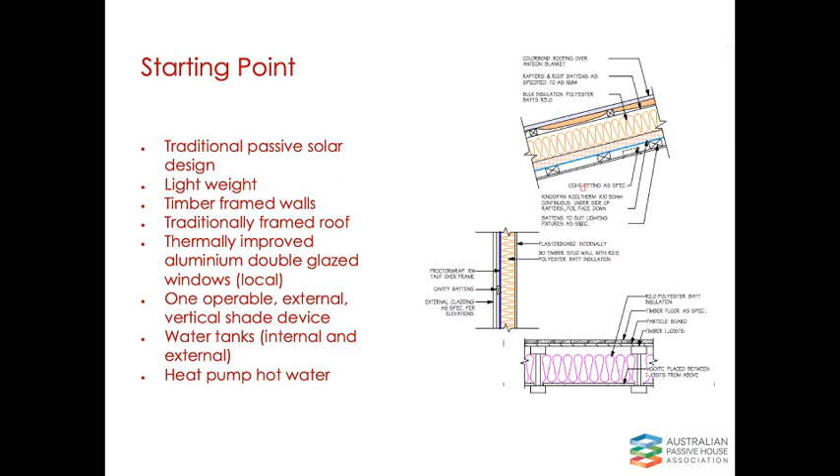This project also had water tanks. There's nothing unusual in that, except that there are 10 of them inside the house as well. That is fairly unique, and I'll talk about that as we go on. Heat pump hot water, and PV on the roof, and all of those things, which again for us were fairly standard back then. Bear in mind this project's got a longevity, like this has been kicking around for somewhere between 3 to 4 years, probably since we first actually sat down and had that first conversation with the client, so it's been a bit of an evolution.

So this is the design of the home, and the great thing about this project and why it's turned into this talk is that this home's been through a series of evolutions in terms of builders, construction methodologies, etc. But fundamentally, the one thing that's never changed is the actual geometry of the building. So it's by default become a fairly good case study. I am not a scientist, my partner is. But it turns out that I designed quite a good research project without designing a research project.

So as you can see, north is up the page. What you can't see on these drawings is that on the left of the page is a fairly busy local road, and to the right at the back of the block, up an 8-metre high embankment, is the main northern rail line of Sydney, i.e. a fairly large noise source. The big dashed line on plan is the tree, and you can see that the tree is fairly close to the house. And then you can also see in the drawing the 10 little circles, which represent the water tanks that are inside the house.

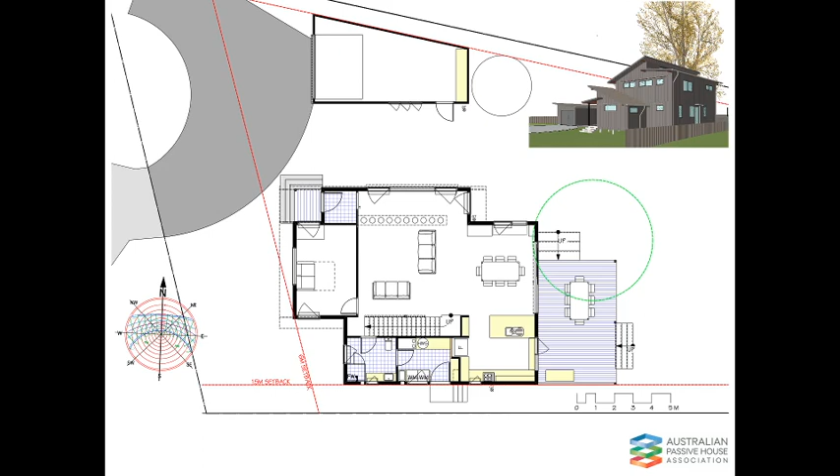As you can see in the perspective top right, the house is all elevated above the ground. Because we wanted to save the tree, groundworks were not a good idea, so we used screw piles, and therefore everything is elevated, which means no concrete slab, which means no thermal mass, other than obviously the bits and pieces in the house, but nothing of substance, no concrete, no brick, and hence water. As many of you know, water's got double the thermal capacity of concrete, so it's actually a really good thing to use. Obviously, there's a reason people generally keep it out of their buildings, though. So anyway, client who understands science and not completely averse to risk. Hence, we got water tanks in the house.

The upper level, again, fairly compact. 3 bedrooms, small second living room, bathroom, big family bathroom that's shared.

Key to note really that there's no ensuite in here. That's a walk-in robe next to the bedroom there, but the joinery seems to have vanished, which is ironic because they haven't built the joinery in there yet. And then you can see the perspective up top right, and you can see those north-facing windows, and you can also see that there's some reasonable sized windows on the eastern facade as well.

There's a few things that change minorly on that east facade, and you'll see that in the photo right at the very end. But that's the crux of the geometry of the house. Window sizes, overall opening sizes, haven't changed in a very, very long time either. So it's a fairly good case study in that sense.

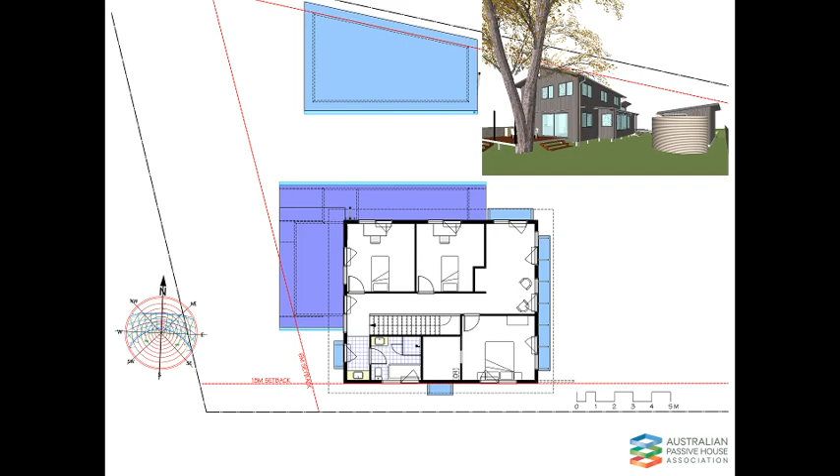Now, like I said, we went through a whole series of iterations of how to get this thing built for the client's budget. And therefore, this next series of slides is really about what happened. So I will hopefully make it as entertaining and as informative as I can.

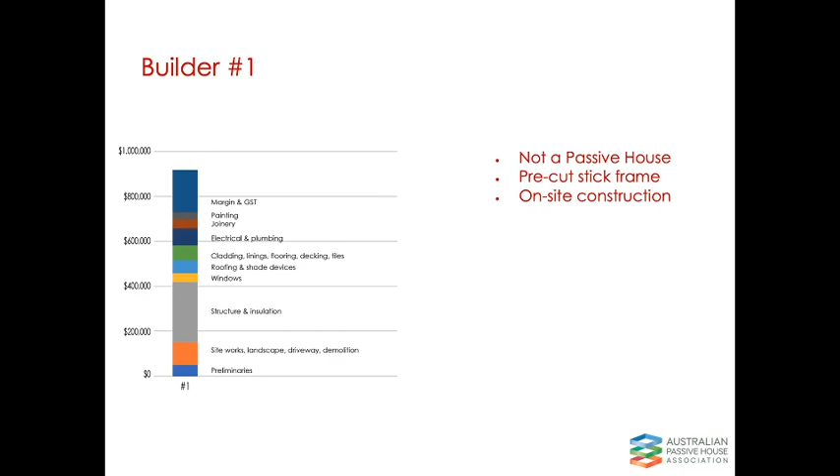So builder one, not a passive house, going to make it on site, had a system that he claimed would make it work incredibly well and cost effectively. To be blunt, he was miles off his original estimate, which he verbally gave to myself and the client, and that probably more than anything else was the thing that got him thrown out fairly swiftly.

So builder number two, again, competent. All the builders were good, competent people. It's not like we're talking cowboys. At this stage, it's still not a passive house, so they're quoting on basically the same thing as builder one. Much more straightforward, built on site, stick frame, nothing particularly unique about the detailing. Exactly as those details I showed at the start.

So you can see here when you start looking and comparing the size of the various color bars, structure and insulation drop massively. Conclusion, of course, being that the pre-cut frame really didn't actually save anything. It might have saved the builder time, but if it did, it didn't translate into cost saving to the client.

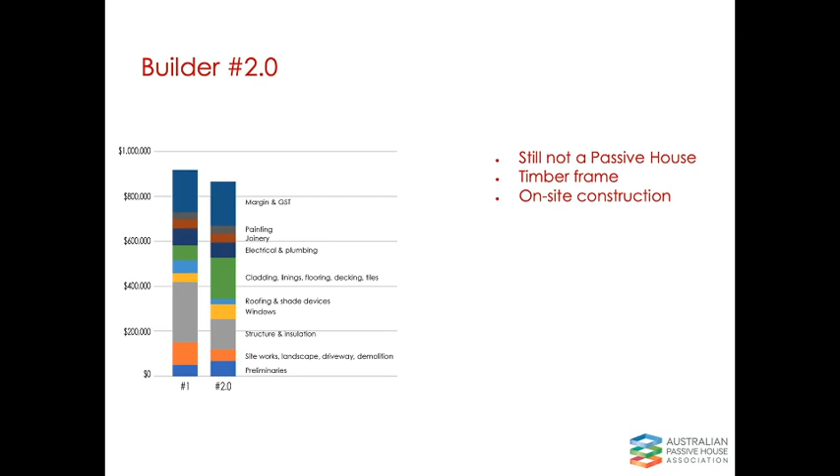And also that builder one had made some assumptions about stuff which were basically incorrect, but due to the fact that he was already way north of where he should have been, we didn't bother to go and correct those things. So arguably his price would have gone higher again. Anyway, builder number two, not necessarily an unfair price for what they'd proposed, and certainly at the time a price that we thought was representative and not hugely surprising.

So at some point between 2.0 and 2.1, we, with the client, made a series of decisions that ended up giving us a passive house.

We changed the construction details, and I will talk about those. I think I have a slide on those in a while. So we changed how the walls were going to be built. We moved to a SIP panel roof. We changed the window suppliers, but not the actual opening sizes really. So there were a few changes, but the geometry remained the same. And obviously we added an HRV in, which hadn't been in the previous schemes.

Delivering a certified passive house was now contractual; delivering a house that achieves an air tightness test result of 0.6 air changes per hour at 50 pascals of pressure was a contractually required thing. We did that, because I'm sure someone will ask, very simply by putting it in the scope of works and just saying the building will achieve a blower door test of blah, blah, blah. And that was it. We didn't make it any more complicated than that. The builder understood what that meant, and that was not really raised as an issue at all.

There were lots of questions about the detailing, but there were no questions per se about actually delivering the result or the fact that it was in the contract. I guess the next question would be, what happens if you didn't? Well, we did, so it doesn't matter. But if we didn't, I don't know exactly how that would have gone, but it could have been interesting. But I guess we were all confident we were going to get there.

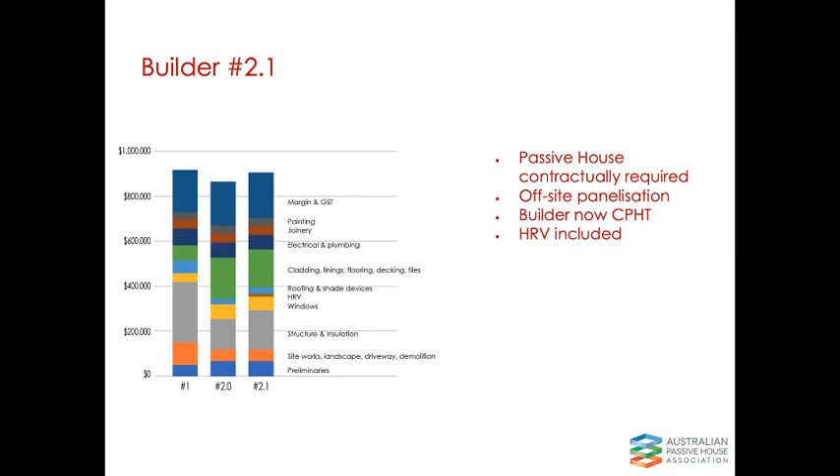So we've been mounting an argument, both for panelisation but also on windows and doors as well, that the full margin is actually not really the way to go. In light of the effort required and the risk involved, it's quite hard to justify 15% on a $150,000 order of panels, for example. When all you think about from a builder's perspective is a couple of phone calls and organising a crane, and yes, they might have to assemble them, but that's separate. And charging what equates to $20,000 for a couple of phone calls is a little bit hard to justify.

So we see cost efficiencies coming through in sorting those issues out with builders, but like I said, it's taken a while, and it can take a robust relationship at times to get those things to a point where the builder's still profitable as well. So never losing sight of the fact that we don't want the builder to get driven into the ground, because if he's not there next week, or if he can't finish this job because he's gone broke, then that's not in anyone's interests either.

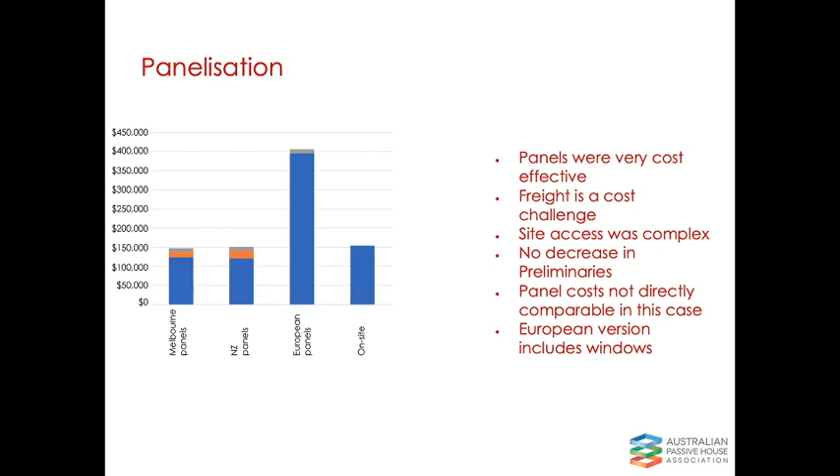I wanted to talk a little bit about the windows as well. So one of the bigger myths, I guess, is that passive house windows are really expensive. My simple conclusion is no, they're not. My more nuanced version is, well, it depends what you compare them to. Like I said at the start, we have a good relationship with a local manufacturer. They use fairly good double glazing. Everything's locally made, and therefore we were paying a reasonable chunk of money for windows anyway.

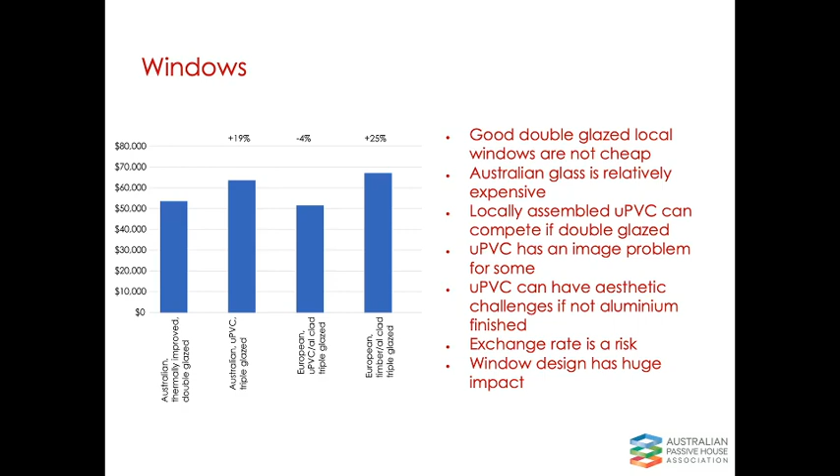And I guess it should also be said that the exchange rate is a risk as well. But to be fair, that applies to a fair few things in Passive House. Because once you look at a few of the other bits that come from overseas, a big shift in exchange rate could be either a blessing or a curse.

So, having talked briefly about the panels and the windows, let's get back to the house itself. So we're still with builder number 2. We're still Passive House. We've gone back to on-site construction because we decided against the panelization for the reasons that I expressed before. There's been a little bit of refining, but as is often the case, the client has decided that they love the house the way it's already designed, and therefore let's just make the money work somehow, which is always quite reassuring from wearing your designer hat.

And what you'll see here is that there was a bit of a decrease in cost, and this was almost entirely due to changing the cladding material. We'd previously spec'd something that was going to, so the builder informed us, end up with a phenomenal amount of wastage. And therefore was going to be very expensive, and they had a preference for a different product which would have much less wastage and therefore would be much cheaper. We were happy with the change anyway, so we really didn't mind. Aesthetically, it achieved pretty much exactly what we were going to get before, and it saved the client a fair chunk of money. So we looked good, builder looked good, client was happy. That's about as good as life gets in our game.

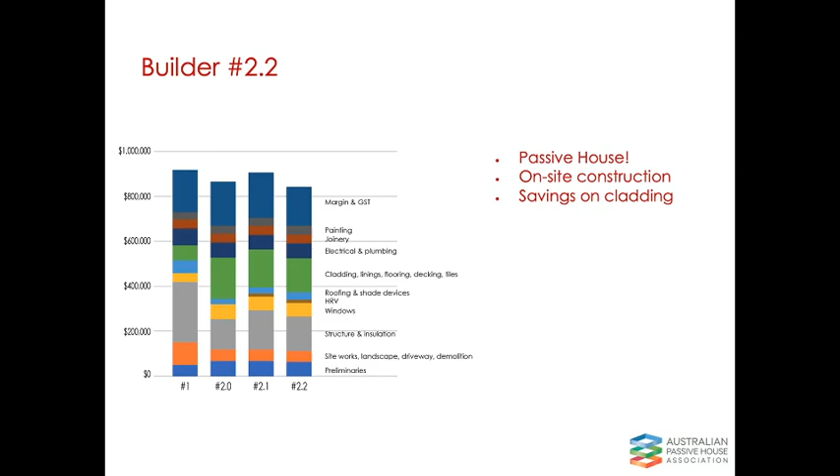So, unsurprisingly, and slightly frustratingly maybe for builder number 2, at this point we've got a price, everyone's happy with the design, and then the client just wants to be sure that they're actually getting the right deal for the price, because it's still north of $800,000, which is not nothing. So we went to a builder who we also know. He's not a certified Passive House tradesperson, and before we started talking about this particular job, he didn't really know much about Passive House at all. He's a thinking builder, which is one of the reasons I really like the guy.

And he's asked a lot of very good questions. He understood it, and eventually he came back with a price. Eventually, not meaning to imply it took him too long, but after a while he came back with a price. And as you can see from the bar, it was a fair bit north of the other guy. In fact, it was like 150 grand north, which was a lot. So unsurprisingly, he was nowhere near getting the gig.

But what was most interesting about this that I found was this explicit risk premium. He and I have a very good relationship. So after he'd submitted the price, I talked to the client, and we'd all agreed that it was going to the other guys. I rang him and basically gave him the bad news, and he went through a very long explanation as to the fact that he'd vacillated between, I really understand the detailing and it's not very complicated, but at the same time, the fact it's an airtight building scares the bejesus out of me because I've never done one before, and I think I loaded the price too much.

So obviously he did, but it was just interesting how his lack of experience, even though he knew in his head how to do it, really didn't come together in a way that was particularly helpful for him or the client or for us. What was fascinating is that about 2-3 months later, he tendered for another passive house against the same builder, and he ended up getting the job, and he was noticeably cheaper anyway. So he continued his mental journey to work out exactly what he could and couldn't achieve. And he has actually just delivered a fairly fantastic blower door test result on a very small 60 square meter granny flat. So he's certainly come a long way in these few years as well.

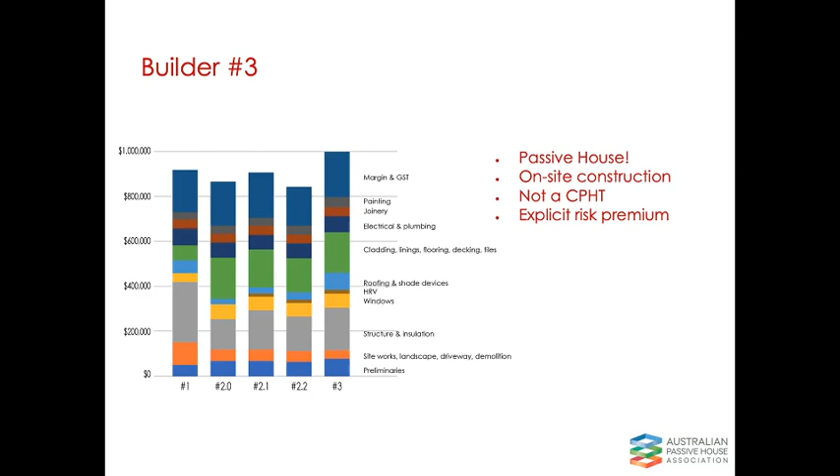So we have a building. It's been priced a number of ways, and the purpose of this talk really is to look at what is the cost of passive house, and this is why I find all this data quite interesting. So what I've done is I've taken away all the stuff that's got nothing to do with passive house. So kitchens, bathrooms, preliminaries, site works, all of that stuff that's just part of building. And you can see that depending on which builder you're looking at, you get slightly different numbers, but let's just say it's about 30%. So therefore 70% of the stuff in construction has got nothing to do with whether your building works. The rest of it's just to do with people turning up and doing stuff, having insurance, paying GST, having kitchens and bathrooms.

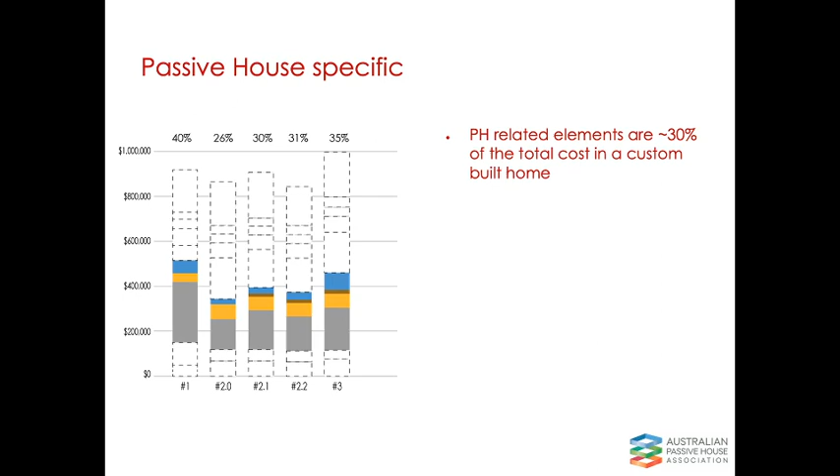And obviously, depending on how many kitchens and bathrooms you have, those numbers can be wildly different. But I would maintain that this being a fairly efficient build, this is probably an accurate representation of the proportional cost of stuff that relates to building performance in terms of thermal comfort and energy efficiency. So we've worked this out, and then if we start to look at the actual detail about the cost increases, we start to note that obviously it's gone up. So we're ignoring number one because it wasn't anywhere near passive, it was basically just a number that was inaccurate in my view. So we started from version 2.0. That was good quality passive solar design, no HRV, no airtightness specifically, and therefore everything from 2.1 onwards is all about the increase in the cost.

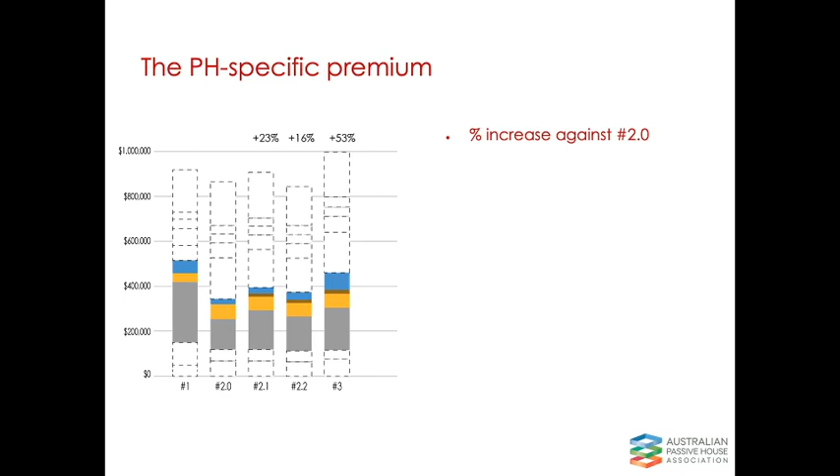One of the things I've completely forgot to mention so far is we actually got less insulation in terms of R value in the roof of this house than we would have had if we'd built it in our usual passive solar way. And that's mainly because we've got the accuracy and the confidence in PHPP to know that we can pull down some of those R value numbers and still get the performance that we need. So we've used that tool to really work out exactly where our bang for the buck is.

Like I've said, version 3 isn't worth too much debate in terms of its percentage differences. Although it might be useful in the sense that if you've got an inexperienced passive house builder and you're going from passive solar to passive house, in this case that was a 15% increase. In some ways that's still not terrible. I mean, it was a lot of money, it's $130,000, but it's certainly not the 40-50% that some people seem to be wanting to have a crack at. So we're taking quite a bit of positive news from this.

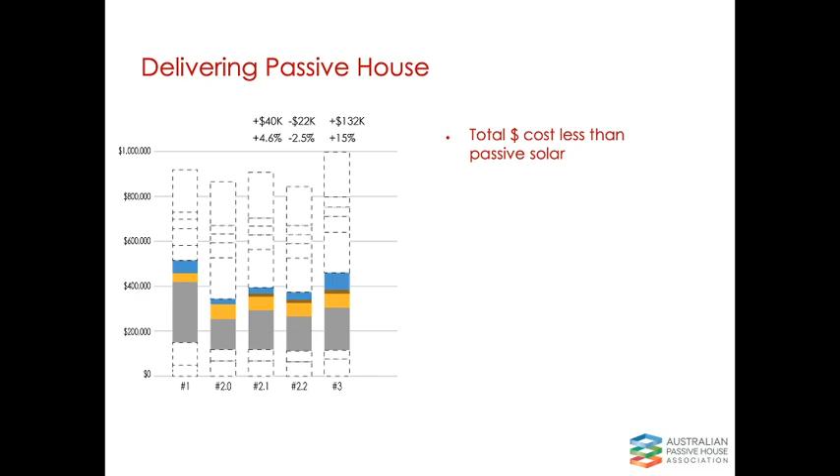So what I'd like to do now is just briefly talk about something that I deliberately ignored at the start, which is where we actually really started this project. So before we got involved with builder number 1, in order to try and deliver the original design as cost effectively as possible, the client had sourced a local building firm who were, I guess, what I'd call Project Home Light. They weren't one of the big mobs by any stretch, but they claimed to be building about 20 houses a year, and they were certainly aiming themselves somewhere above the mainstream Project Home market, but certainly not in the upper range of the custom builders either.

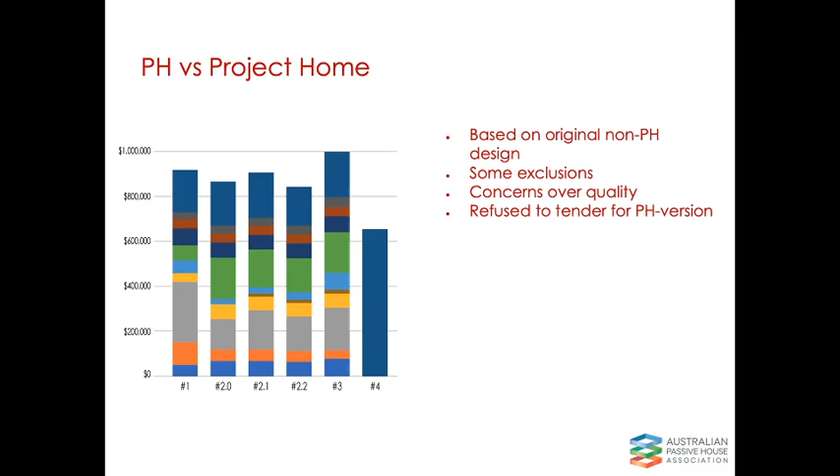I just want to add a couple of things on windows that I didn't say back at the start. This is a completely different project. This is partly about the things we've learned along the way, but really it's around the design of windows in buildings, because Thornleigh is a very passive solar approach. It's got a lot of windows for cross ventilation. It's got a lot of windows full stop and a lot of windows that open. That's resulted in quite a bit of window area and also framing.

And I've come up with what I think is a fairly robust saying, whatever the phrase may be: glass good, frame bad. Even with these windows, the frames are really, really good, but they're still not as good as the glass on the whole, and therefore having as little framing as possible is in everyone's interest. The frames are also fairly expensive, and the glass, compared to the frames, fairly cheap. So both from a performance and a financial point of view, reducing the frame glazing ratios is quite helpful.

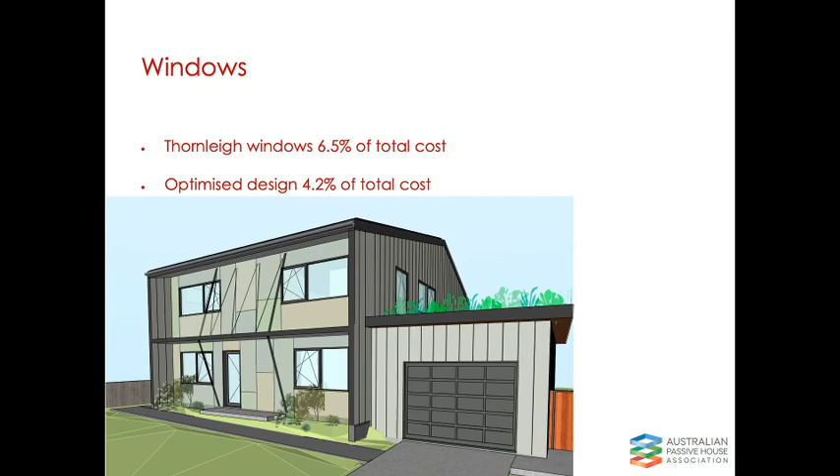And you'll notice in this image, and in the images of the Thornleigh house, that we're also reverting to this approach whereby we have one opening sash in a window, and then the rest of it is just a large fixed pane of whatever size we need. So we're maximizing the sash size, basically dictated by the hinge's capacity to deal with the weight of the glass, and then everything else is just fixed glass. And this is a little bit aesthetic, but also based on the experiences of most people, in that most people aren't opening these windows very often, so let's just keep them simple.

So I'd like to try and wrap up in a fairly coherent way. So these are probably my headline conclusions. The cost premium is definitely negligible or even non-existent if you're talking about custom design and you're making strategic decision making. And in that I include things like being flexible on the cladding material, because fundamentally it'll look the same. And in the Thornleigh project in particular, the decision not to have an ensuite bathroom saved them tens of thousands of dollars, and they were very happy with that decision, and that enabled them to afford the house that they got. Not everyone's going to make that choice.

It's hard to accept that the passive house is the thing that's making things expensive if people are also not prepared to make the hard decisions about what they prioritize. So I think those conversations, which are often very awkward, need to be had very early on, and setting the benchmarks for what is important, preferably in a hierarchical order, is helpful. The cost premium to a project home is about 32%, but really that isn't the issue. The issue is they just can't deliver them at this point in time. That doesn't mean we should not try, but at the moment it's not working.

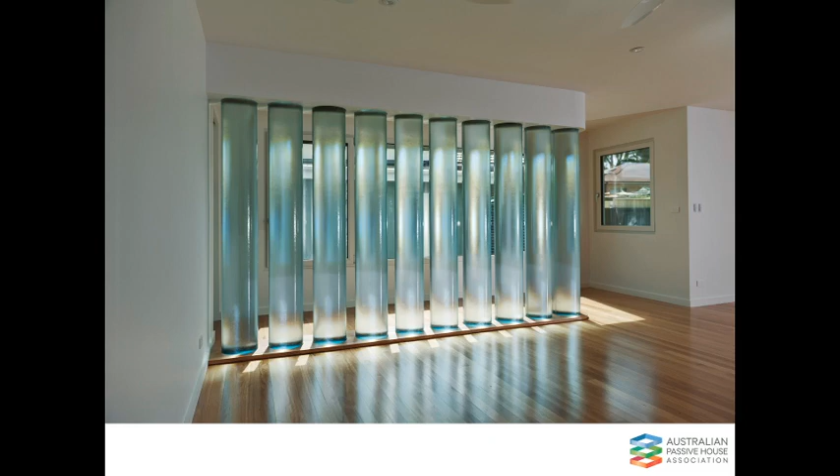But from a thermal performance point of view, they're accounted for in the PHPP, but we can take them out and we still pass with flying colours. But they will help and make it slightly better. And Matthew, being the scientist he is, has got temperature sensors in a couple of them, top and bottom, and can tell you what the water temperature is at any time you like.

And if you want to, he's got a blog that he's writing about what happens in the house. So if anybody's interested in reading that, if you flick me an email, I'm happy to share a link to that as well, because it's quite interesting.